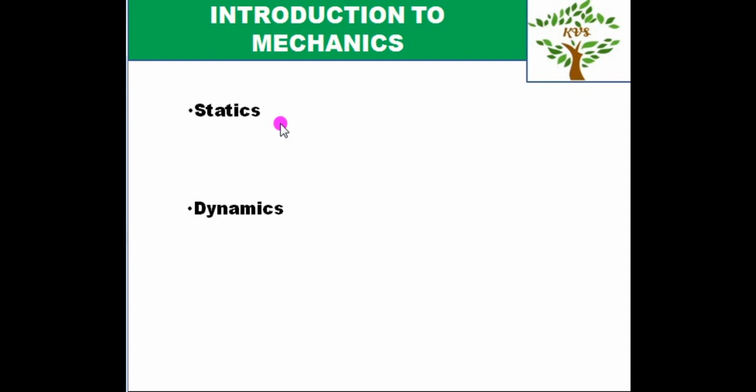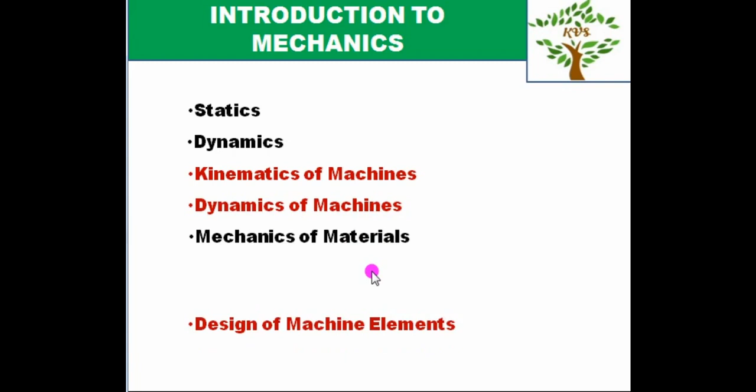Mechanics is not a single course. It is a sequence of a few courses. They are statics, dynamics, kinematics of machines, dynamics of machines, mechanics of materials, design of machine elements, design of transmission systems, and fluid mechanics.

Out of these 8 courses, except fluid mechanics, in all the courses the concepts of mechanics are applied on solids. In fluid mechanics, the concepts of mechanics are applied on liquids and gases. These liquids and gases are commonly known as fluids.

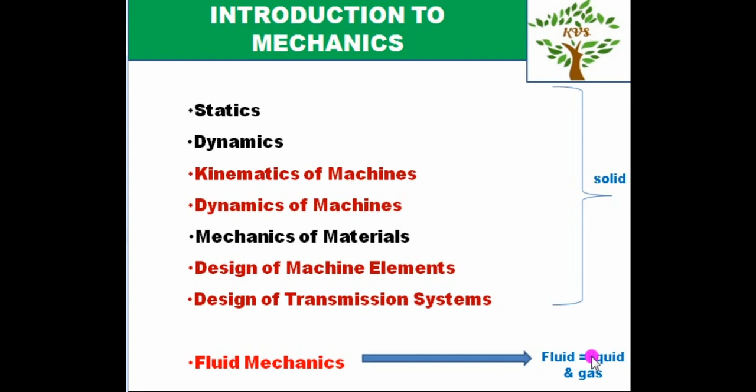When statics and dynamics are combined, they are called engineering mechanics or rigid body mechanics. Similarly, when kinematics of machines and dynamics of machines are combined, they are called theory of machines or mechanics of machines, and mechanics of materials is also known as deformable bodies mechanics.

In this semester, we will discuss statics, part of engineering mechanics. The dynamics part of engineering mechanics will be discussed in the second semester. Kinematics of machines, dynamics of machines, and mechanics of materials will be discussed during your second year course. Design of machine elements and design of transmission systems will be discussed during your third year course. Fluid mechanics will be discussed during your fourth and fifth semester courses.

In summary, mechanics is a branch of physical sciences that is concerned with the state of rest or motion of bodies that are subjected to the action of forces. In general, mechanics can be subdivided into 3 branches: rigid body mechanics, deformable body mechanics, and fluid mechanics.

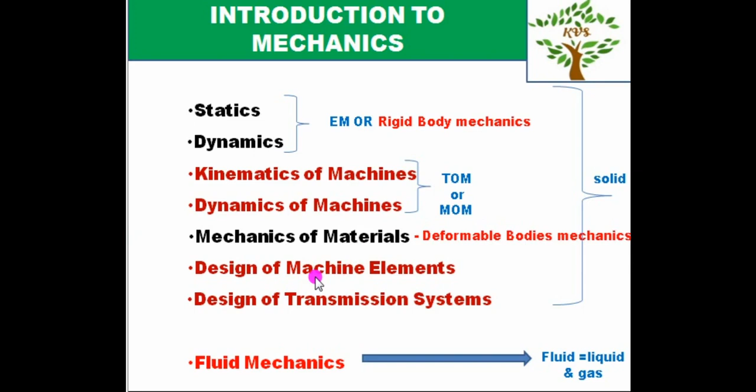Now, let's start our discussion about the course engineering mechanics. Engineering mechanics is the science which deals with the effect of forces on objects either at rest or in motion. Engineering mechanics is classified into 2 categories: statics and dynamics. Statics deals with bodies at rest and dynamics deals with bodies in motion.

Dynamics is further divided into 2 categories: kinematics and kinetics. Kinematics is the branch of dynamics in which the forces which cause the motion are not considered. Our main focus is the displacement, velocity, acceleration and time. Kinetics is the branch of dynamics which considers the forces which cause the motion.

So, statics deals with the equilibrium of bodies and dynamics is concerned with the accelerated motion of bodies. We can consider statics as a special case of dynamics in which acceleration is 0. However, statics deserves a separate treatment in engineering education since many objects are designed with the intention that they remain in equilibrium.

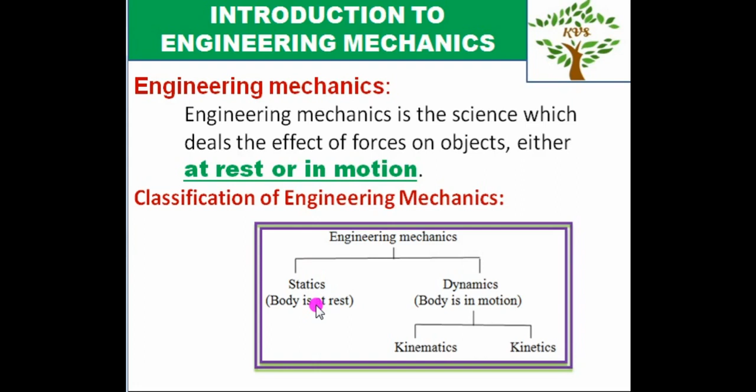Rigid body. A rigid body is a body which does not deform under the action of forces. A rigid body can be considered as a combination of a large number of particles in which all the particles remain at a fixed distance from one another both before and after applying a load. A rigid body differs from an elastic body in the sense that the latter undergoes deformation under the effect of forces acting on it and returns to its original shape and size on removal of the forces acting on the body.

In a real sense, no solid body is perfectly rigid because every body changes its size and shape under the effect of forces acting on it. In actual practice, the deformation, that is, change in shape and size of a body, is very small and therefore it may be considered as a rigid body.

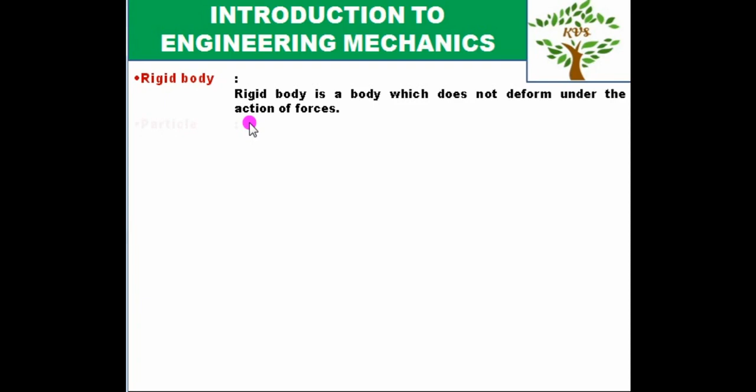Particle. A particle may be defined as an object whose mass is concentrated at a point, which means a particle has a mass but a size that can be neglected. For example, the size of the Earth is insignificant compared to the size of its orbit, and therefore the Earth can be modeled as a particle when studying its orbital motion.

When a body is idealized as a particle, the principles of mechanics reduce to a simplified form since the geometry of the body will not be involved in the analysis of the problem. Statics. Statics is the part of mechanics which deals with bodies at rest. Dynamics is the part of mechanics which deals with bodies in motion.

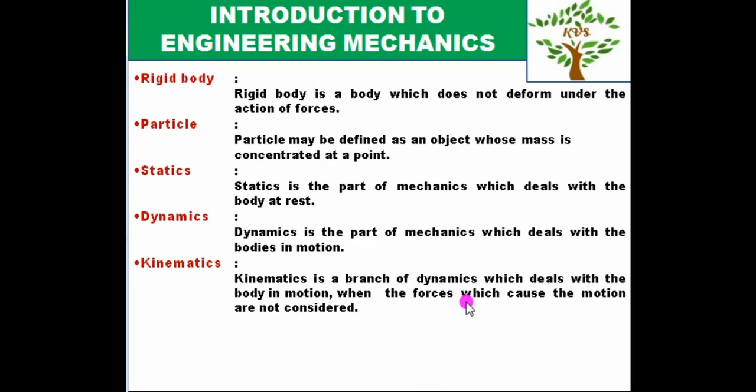Kinematics is a branch of dynamics which deals with the body in motion when the forces which cause the motion are not considered. Kinetics is a branch of dynamics which deals with the body in motion when the forces which cause the motion are considered.